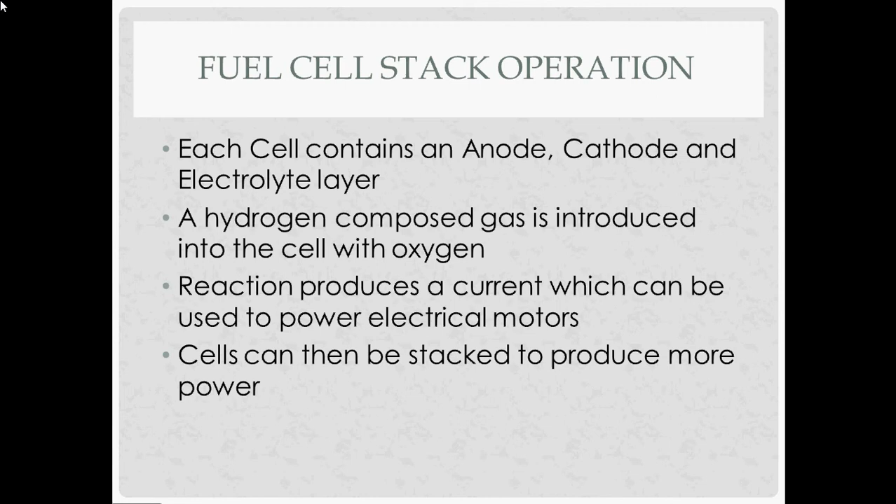The first battery was created in 1799, known as the voltaic cell, by Alessandro Volta. The principle of a fuel cell was first conceived by Humphrey Davy in 1801. It was then further developed into a working fuel cell by chemist William Robert Grove in 1839, known as the gas battery.

Little progress was made after Grove created the first fuel cell, as the parts were unstable and interest in the technology was reduced, up until a spark of interest appeared in the mid-20th century.

The first transportation vehicle ever powered by a fuel cell was made possible in 1959 by Harry Karl Ihrig. The vehicle was an Allis-Chalmers farm tractor that was fitted with a fuel cell system designed by Cambridge engineering professor Francis Bacon. The fuel cell was modified and produced 15 kilowatts of power.

Allis-Chalmers gained interest in the technology and went on to partner with the United States Air Force to develop other fuel cell vehicles. These vehicles ranged from forklifts all the way up to underwater marine vessels.

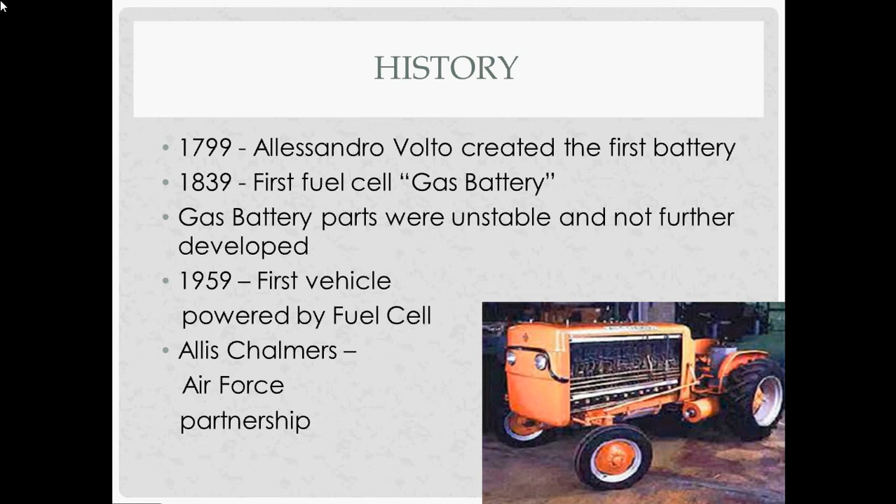The first road-driven fuel cell-powered vehicle was developed and created by General Motors. The vehicle was a 1966 GMC Handivan that GM suitably called the Electrovan. The vehicle utilized a Union Carbide fuel cell and used both liquid hydrogen and liquid oxygen for fuel.

It was able to travel at speeds in excess of 70 miles per hour and had a range of 120 miles, which was quite promising for the time. The vehicle was shown off quite frequently at events, but in the end was not further developed due to its high costs to implement.

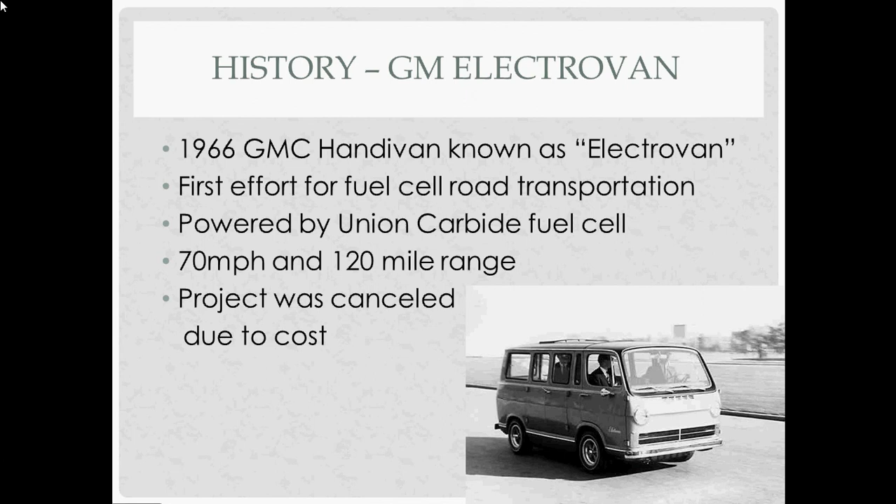Advancements are being made into a new technology called PEM. This stands for Proton Exchange Membrane Fuel Cell Technology. The advantages over current technology are the high power density that is offered, as well as low emissions in the form of heat. If the technology is invested in, it could be mass-produced at a low cost.

These cells function much like a conventional fuel cell. A negative and positive charge is placed across the membrane which creates positively charged protons to enter the membrane. The positively charged protons join with negatively charged oxygen which creates water. The water is expelled by the cathode and the reaction will begin again as a cycle.

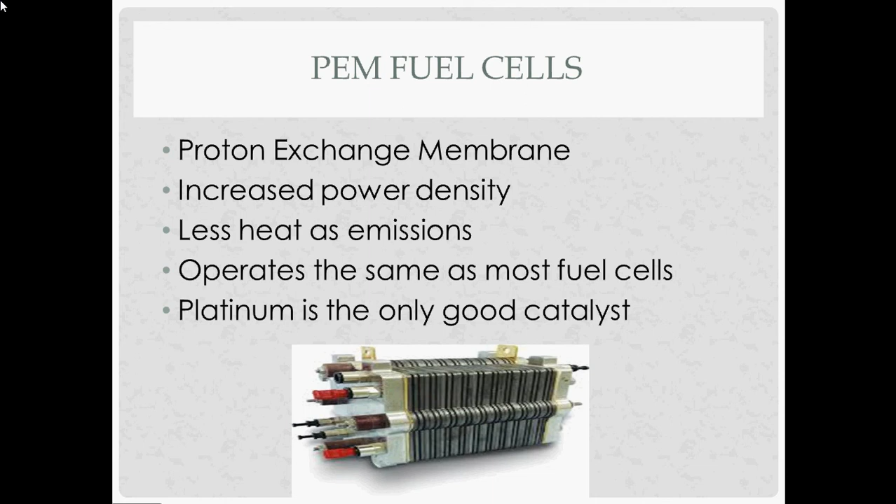The 2015 Hyundai Tucson is a mid-size sport utility vehicle. The vehicle is being offered as part of a 3-year lease program to test the vehicle and gauge public interest in hydrogen fuel cell vehicles.

Aside from its $500 per month lease and $3,000 down payment, the vehicle appears promising. That price includes a government subsidy of $5,000 and free hydrogen fill-ups for the 3-year lease period. It has an operating range of 265 miles, which cannot be touched by current battery-powered electric vehicles.

Battery-powered electric vehicles require being charged after 50 miles of driving, with a charge time of up to 8 hours. This Tucson can refuel its carbon fiber-wrapped fuel tank with hydrogen in roughly 10 minutes, making the driving experience much more comparable to what the public is used to.

Toyota plans to introduce its new Mirai fuel cell-powered car later this year. Like the Tucson, the new Toyota Mirai will be leased out only in California, where its market is the largest due to the state's stringent push towards zero-emissions vehicles.

The car was designed to look like nothing else currently on the market, and it succeeded in that aspect, much like the Prius. The car's AC electric motor produces 151 horsepower and 247 pound-feet of torque. The Mirai has a slightly dated nickel metal hydride battery, similar to the Prius. This battery allows for regenerative braking and also helps with acceleration from a stop.

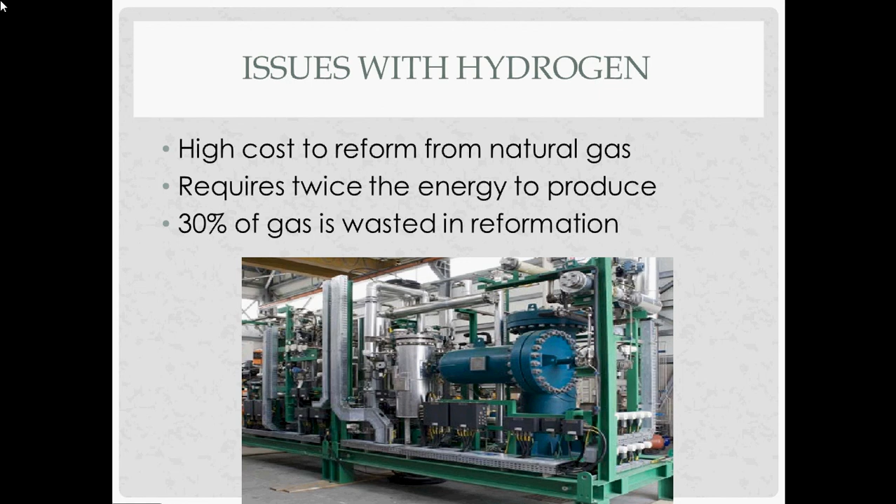The most cost-efficient method currently used to produce hydrogen is through steam hydrocarbon reforming, which is the most common method of producing hydrogen. Methane gas is introduced to steam at pressures of 3 to 25 bar at temperatures exceeding 700 degrees Celsius. This causes a chemical breakdown when a catalyst is introduced, yielding hydrogen, carbon dioxide, and carbon monoxide. The combination of gases is then reformed in a process called pressure swing absorption, which rids the gas of carbon dioxide and other impurities, leaving almost pure hydrogen. This process accounts for 95% of current hydrogen production.

Even as widely used as the process is, it is still not quite up to standard with other energy sources, such as using just pure natural gas.

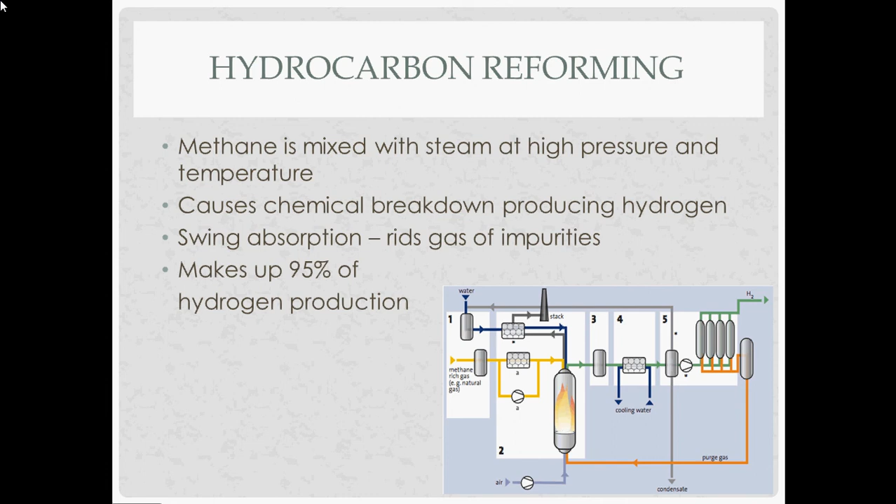The newest and one of the most promising hydrogen production methods comes from the use of an artificial leaf that conducts photosynthesis and splits hydrogen from water. The research into this potential alternative fuel derived from bacteria is being conducted among faculty of Harvard University.

Essentially, an artificial leaf is used to conduct the photosynthesis process from sunlight that will split water to create hydrogen and oxygen. A genetically modified bacterium can then be used to take the carbon dioxide and hydrogen and produce a liquid fuel called isopropanol. Isopropanol is also known as rubbing alcohol, which is a component in fuel cells. The leaf can produce 216 milligrams of the isopropanol for every liter of water. The efficiency of this process is similar to corn plants making kernels from the sunlight.

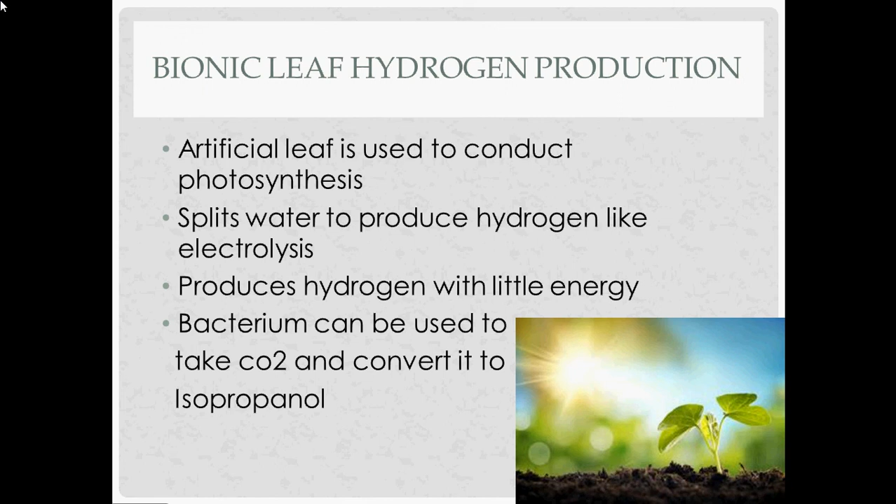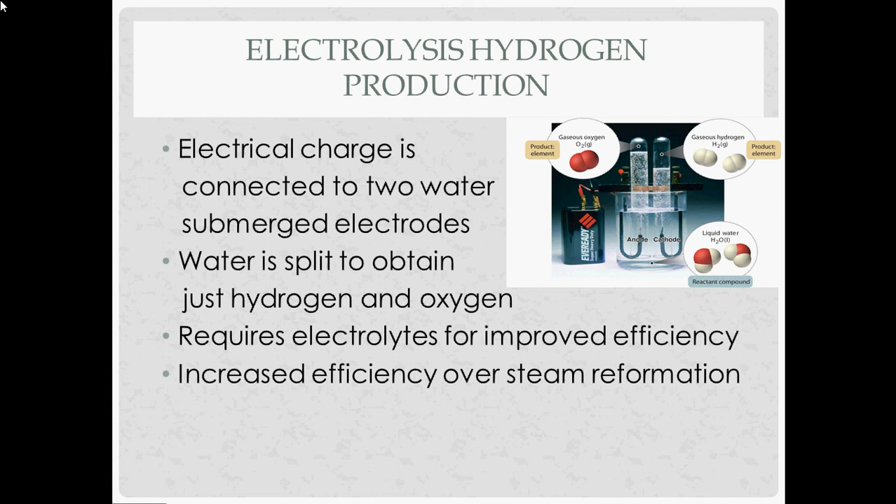Pure water actually requires more energy to complete the process. The water has a higher electrical efficiency when introduced to an electrolyte such as salt, an acid, or a base. This will reduce cycle time and increase efficiency. The process of electrolysis is a cleaner process than steam reformation and produces a much more pure hydrogen gas. In industrial applications that need pure hydrogen, this method is the preferred option.